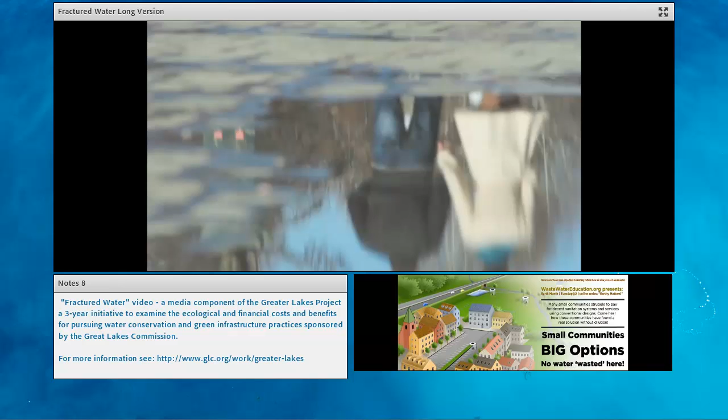One of the challenges we have in water management is the disconnect between what the general public perceive and what reality is. The way we have built infrastructure in our urban areas has disrupted the natural flow of water, which has created flood issues, loss of water supply that we need, and massive erosion issues we've never really had to deal with. That is affecting not only nature, habitat, and wildlife, but also having very negative consequences for people living in municipalities.

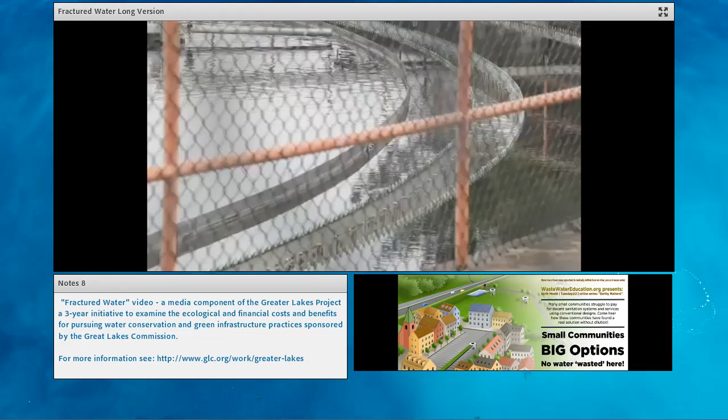With these extreme events, we're seeing basement floodings, we're seeing water treatment plants having to shut down because of algae growth. Those are all things that we're starting to realize the way we're doing things today is not working. A lot of that old infrastructure is now starting to leak, starting to break down, and therefore we are in danger of huge financial issues.

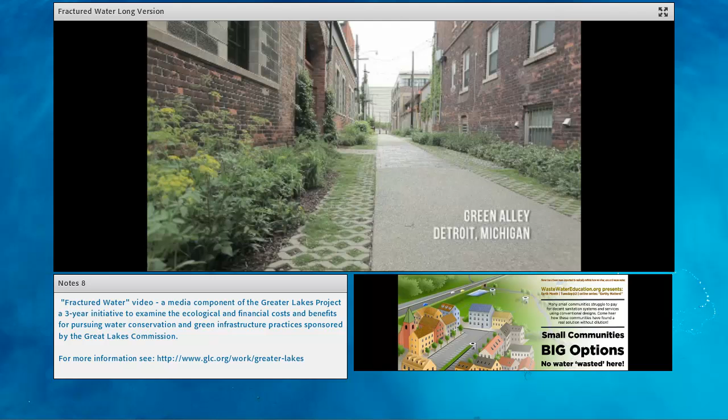Permeable driveways — that's interlocking bricks that allow water to go into the ground — rain gardens to reduce water consumption, but also to treat rainwater before it goes into the ground.

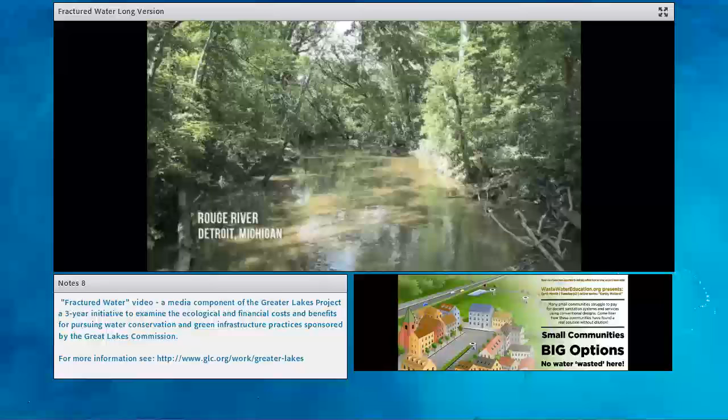We're in the Eliza Howell Park in the Brightmoor neighborhood of Detroit, along the Rouge River Basin. If we can incorporate more natural systems — and much of this is being contemplated and implemented right now through the Detroit Water and Sewerage Department in this area — we can actually be better stewards of this river and the Great Lakes overall.

Incorporation of green infrastructure systems, both large and small, they're not inconsistent with a very focused urban agenda. In fact, they're quite complementary. But we also need to be thinking much more creatively and innovatively about how we adapt new, different systems that actually leverage the existing assets we have on the ground, the topography that we have, the hydrology that's present. These are things we can do, and they can have a long-term, really powerful impact on overall cost and revenue balance, which helps everyone involved, but also it brings neighborhoods together and creates a much more healthful environment for people.

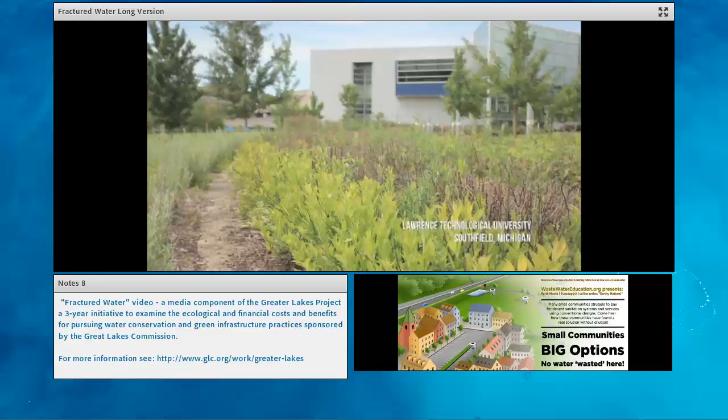We need to evolve just like other industries do in providing new products and evolving our science. Part of that means that we need to engage our community. We need to reconnect them with the water and with their environment. We need to show them how to recreate nature on their own properties and how business can do that economically and sustainably. But until we start seeing water conservation, water efficiency, and green infrastructure as core components of solving our

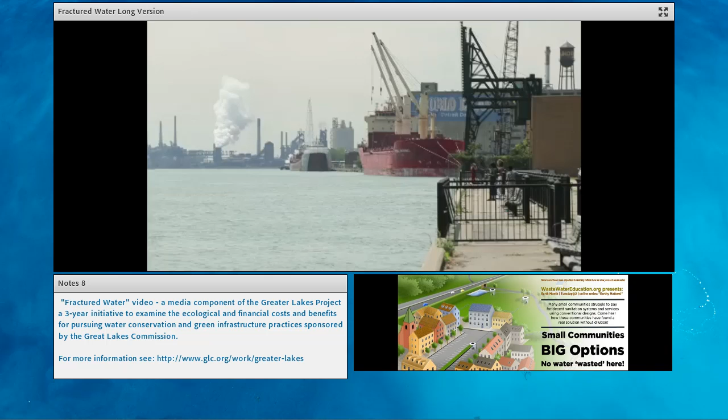water needs in municipalities, we won't make the big change that we need. And we've got to find a way to have a better coexistence with the Great Lakes. I think many folks are working to get there, both within the city of Detroit and across Michigan, and certainly within Ontario. But we do need to get there, and we need to get there fast to lay the groundwork for decades and decades of different types of investment over time. These things don't happen overnight. But our sense of urgency is really strong because we know we've got to set that new direction.

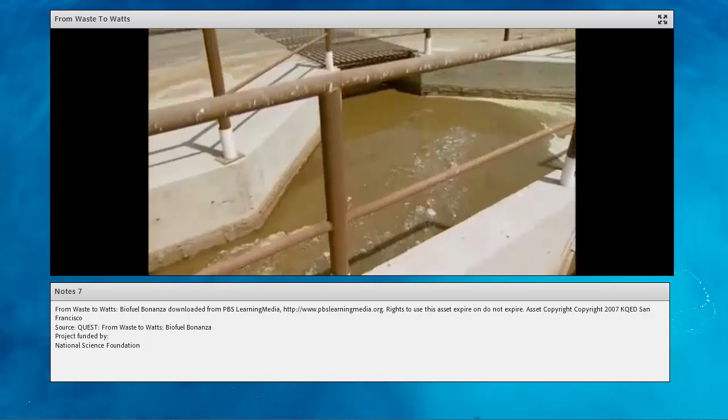Here at Joseph Gallo Farms, near Atwater in Merced County, General Manager Carl Morris shows me how to make power from poop. So this is the remnants of the cow poo. That's correct, in my hands. Yes, it's actually very nice and fluffy. The whole process starts when wastewater from the company's cheese plant is used to flush manure from cow stalls. Then solids are separated from liquids. Well, this is the separated manure solids from the separator here. It's actually a very high straw content. It's just what passed through and wasn't digested, and gets separated out.

The remaining manure water is pumped into a 7-acre covered lagoon, where natural bacteria from the cow's gut break it down in an oxygen-free, or anaerobic, environment. Well, here we are on our digester. We're actually walking on top of 45 million gallons of manure water. That is a new experience for me, I have to say. This is covered by... As bacteria consume organic material, a complex biochemical reaction occurs, and the carbon content of the waste is converted to methane. The dairy's equipment then traps the gas, cleans it, and burns it as fuel in 2 generators.

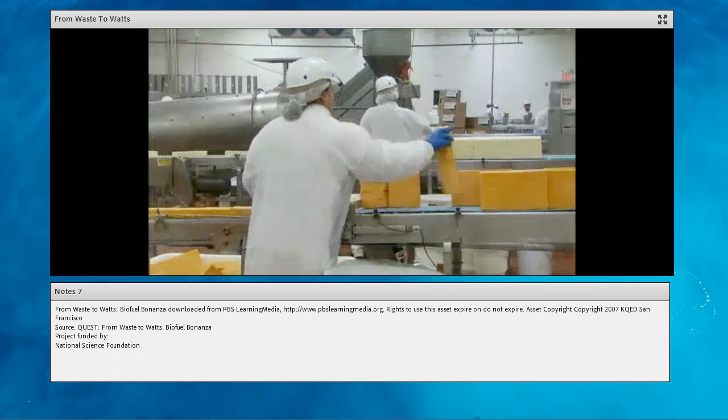The system provides as much as 80% of the electricity needed to run the company's cheese plant. And how many cows do you have here at Joseph Farms? Well, this dairy, our Cottonwood dairy that feeds this digester, is about 5,000 cows. We have a total of 16,000 cows on 5 dairies. And how much manure do they produce every day? A lot.

The average cow produces about 90 to 100 pounds of manure, so you do the math. Every single day? Yes. Does it go up and down then? Not that much, it's usually billowed up like this. If it goes up too much, there's emergency vents there.

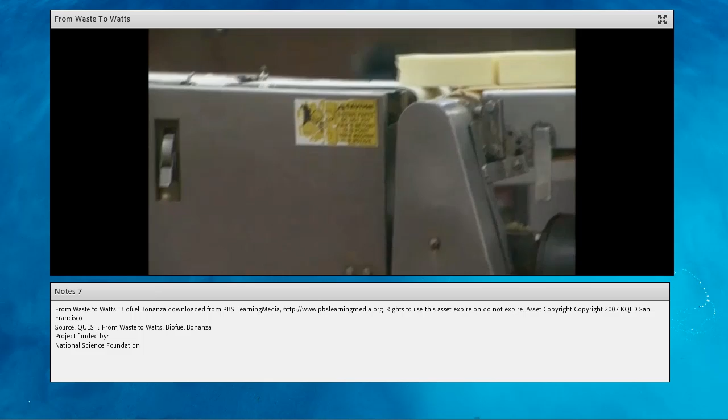All this gas adds up to impressive savings for Joseph Gallo Farms. They've knocked off $1,500 a day from their electricity costs and saved 300,000 gallons of propane per year. The system cost about $2 million, $600,000 of which was funded by a grant from the California Energy Commission.

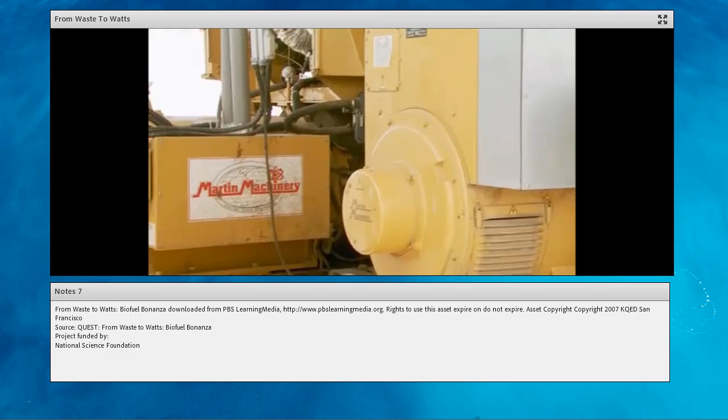Although the technology is promising, experts say it won't be widely installed at dairy farms until utilities like PG&E are required to buy back the electricity they generate.

If the methane from California's 1.7 million dairy cows was captured and converted to biogas, it could supply upwards of 120,000 homes with electricity. You know, when I see waste, I think of resource.

We don't make a connection between our food and the products we consume and the waste we generate. People know, they've heard got milk, but they don't think get manure. And that's something I want people to get, because that is really an important issue in terms of both environmental impact and potential environmental benefit.

Manure, while not quite as sexy as other green energies like solar and wind, has an added ecological advantage. Not only does the use of biogas offset the use of fossil fuels, it also greatly reduces the air and water pollution that would normally result from dairy operations.

Because we have a lot of cows in California, actually 1 out of every 5 gallons of milk produced in the United States comes from California, so there's a lot of cows producing waste. They have an impact when that waste hits the ground. And when it hits the ground, it does more than just stink.

It contributes significantly to global warming. Cattle waste is responsible for about 20% of all the methane emission in the U.S. Like carbon dioxide, methane is a greenhouse gas, but methane is 21 times more damaging than CO2.

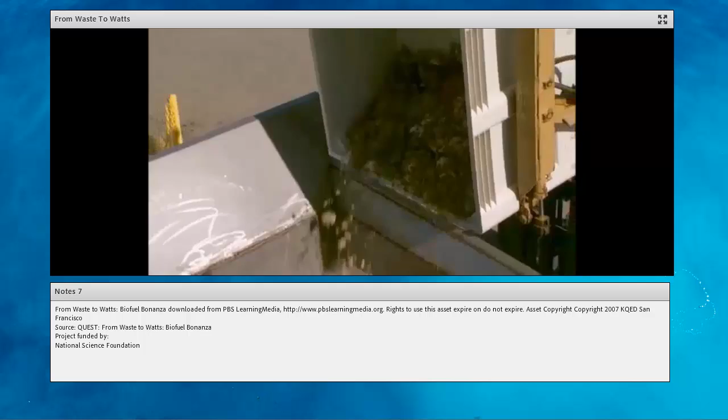Here's how it works. Food waste is collected from restaurants and institutions, like here at the UC Davis cafeteria. It's then trucked across campus to the digester, where it's loaded into the hopper. Conveyor belts pump the stinky sludge into tanks, where special microorganisms chow down.

As the microbes digest the waste, they produce gases like hydrogen and methane. Zhang's design, which was built by on-site power systems, captures and separates these gases, then turns them into several different kinds of fuel. We make a methane gas which we can use to run a generator and make electricity.

We can make compressed natural gas. We can make liquid natural gas. We've got hydrogen we can use for fuel cells. We can blend the hydrogen with either natural gas or diesel for a higher energy yielding fuel.

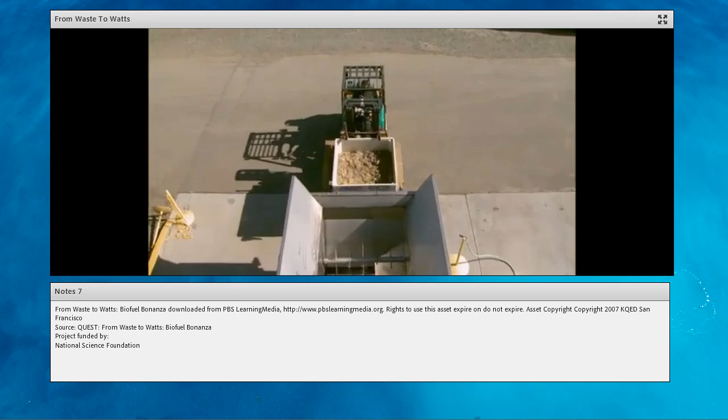Zhang's digester has the capacity to transform 8 tons of waste a day into enough electricity to power 80 California homes. It was designed as a proof of concept to demonstrate the commercial viability of this technology.

One of the big advantages of this one - there's a lot of digester technologies, but they're more centralized plants, you have to bring all the feedstock in. We're scalable. We can build it to fit the size of the customer's needs.

These are 10,000 gallon tanks. We're looking at some for the City of Industry that will be 250,000 gallon tanks. That allows us to go anywhere in the state and build it where the waste is, and that gives us an amazing advantage over the other technologies out there.

Wherever people eat, there's waste, lots of it. And NorCal Waste Systems in San Francisco is putting it to good use. For its composting operation in Vacaville, they collect 300 tons of food scraps every day from more than 2,200 restaurants in the Bay Area, including the 4-star Jardiniere in San Francisco.

Here we have our big green dumpster, so any of our renewable food scraps go into this dumpster here. And then we have our blue bins and our black bins, the black bins being actual garbage, and then the blue bins being recyclable glass and paper.

And since you started this program, about how much have you reduced your landfill waste? I think we've probably reduced the landfill waste to 8 to 10% of the garbage that we're generating now.

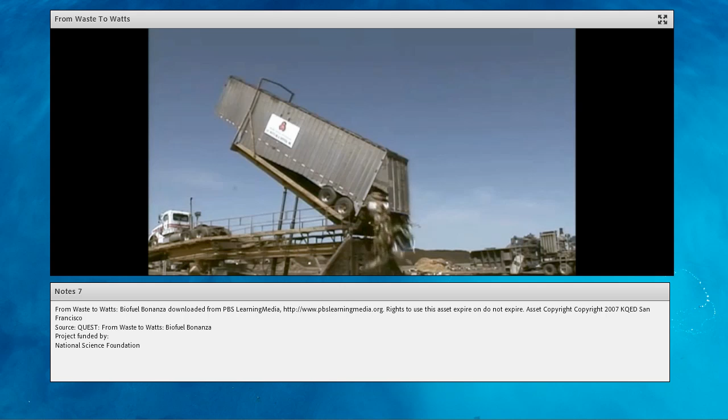So I hope that has whetted your appetite, so to speak, for what's coming up. If anything, that should have drawn your attention to a couple of things here.

First of all, the idea that backyard septics is not the only thing that we're talking about here. Easily a quarter to a third of the country relies upon individual treatment systems. And these are not just your grandpa's backyard septic system. These are large-scale, commercial-scale, on-site treatment systems.

That video we saw is 10 years old. And that may have been a proof of concept, but now there are digesters all across the country. There is a very large municipal digester plant, not, I would say, 60 miles from where I'm talking from.

And the idea that individual treatment for individual need is eminently financially scalable, and also makes really good sense if you are trying to preserve the character of your community, or you have a particular type of waste stream that you're dealing with, such as the winery, such as the cheese plant.

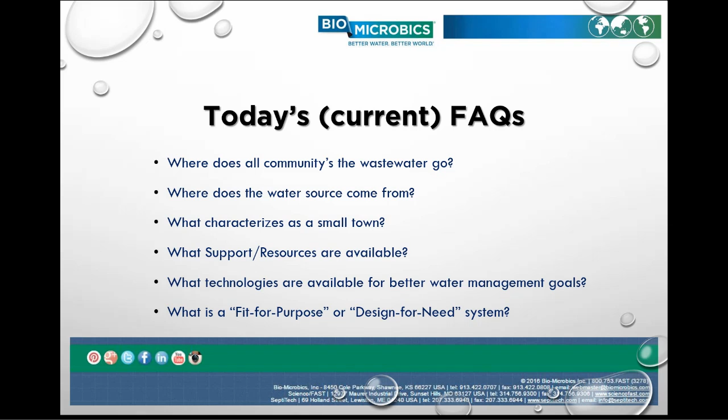Centralized sewering systems are made to be able to leak. I mean, it's just infrastructure with pipes going miles and miles away. The urban water systems leak the equivalent of 13 million Olympic-sized pools every year. This is a statistic that was shared on World Water Day this year, that the World Bank Group and the World Bank Water Group had tried to impart, showing why there's a growing concern for the way centralized sewering systems are not addressing the need.

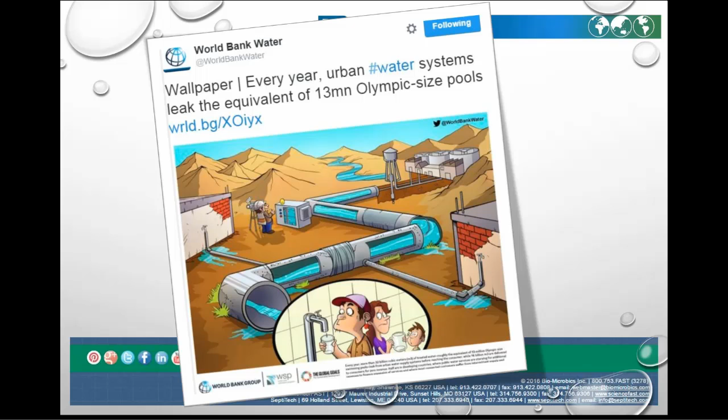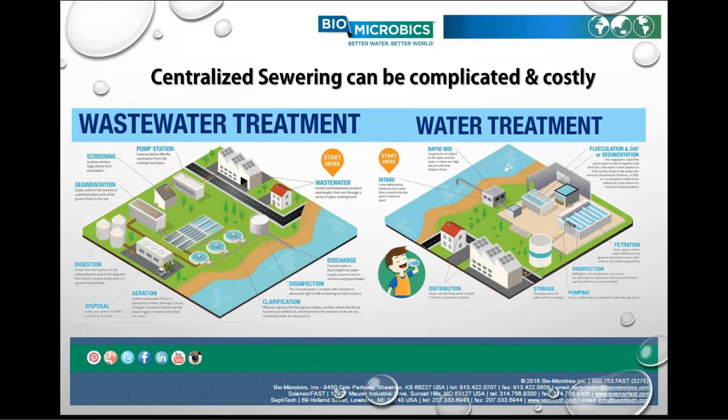But instead of water bills for decentralized technologies, you can actually treat and manage your own water on site versus having to pay and throw away that water that's been used.

So decentralized technologies take wastewater solids, just like the wastewater treatment plants. It takes the wastewater, separates it from organics and inorganics, also separates the material down to soluble, insoluble levels, and down to the degraded level to where it's treated water. So once you remove the waste, you're back to the original component of water and have it available for water reuse.

The driving force for water management systems, with these statistics, more than a quarter of the homes are currently on septic systems, whether it's advanced or just conventional. These systems are currently in operation and meet any number of regulatory requirements.

The projection is that 37% of new home constructions will be on on-site systems, and that could include gray water treatment systems and recycling, or other systems like irrigation or water reuse systems considered with new home construction nowadays. 10 to 20% of the older systems will need to be maintained or upgraded, that's something that is a yearly aspect of the type of systems we're talking about.

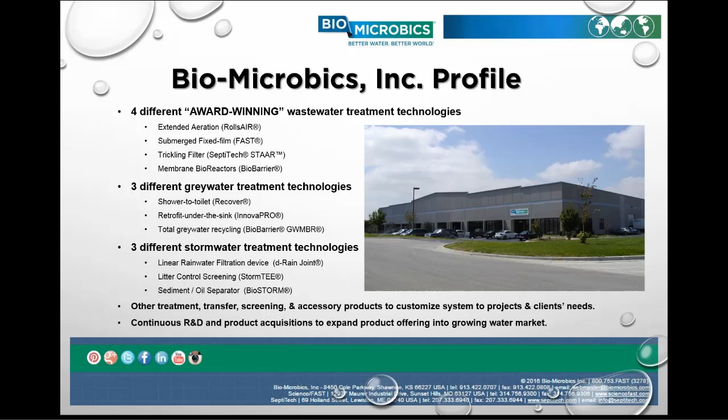So again, Bio-Microbics, we are the manufacturer of these treatment systems. Why Bio-Microbics? We have 4 different wastewater treatment technologies, whether it's extended aeration, submerged fixed film, trickling filter, or even membrane bioreactors. 3 different gray water treatment technologies, 3 different stormwater technologies, all housed under one roof. So if it deals with water, we pretty much have a system that's designed to treat that. And other treatment and transfer systems that enhance a particular treatment system to meet the goals of the project. So we do all of that.

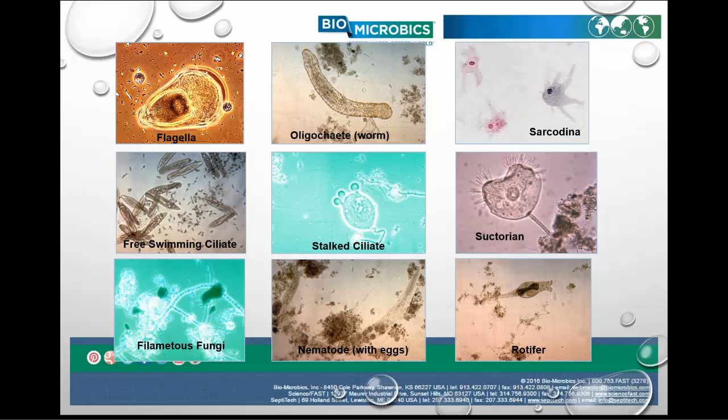So on on-site treatment systems, there's different levels of treatment, whether it's primary, which is just a screening device or something that removes the biological oxygen demand, or the BOD, and the total suspended solids to that level. We have a higher degree of treatment with advanced wastewater treatment systems. That's secondary, and that's what we call 30-30, BOD and TSS. And then the tertiary treatment level is even more of a treatment, higher water quality, and we call that 10-10 with BOD and TSS.

Again, this is to separate out all the solids to organic, inorganic, and each of the different levels addresses those needs, from the first screening from primary, and we do that with effluent screening devices, grease traps to trap most of the fats, oils, grease, and large inorganics, and be able to break down the larger organic solids. But it doesn't eliminate nutrients or oxygen depletion problems. This is more of your conventional septic system, only goes this far with its treatment level.

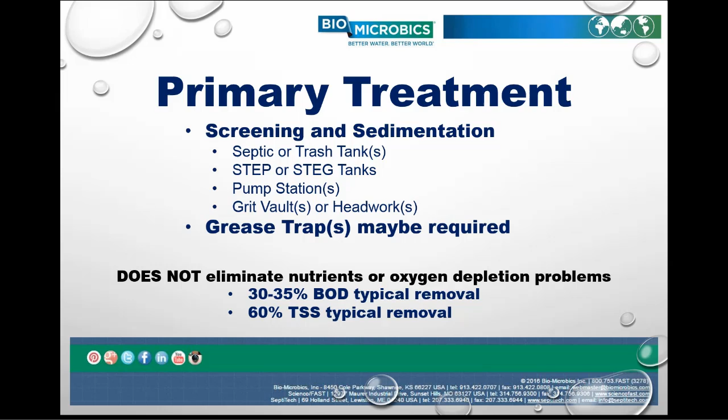For our treatment systems, we focus on secondary treatment. We introduce aeration treatment into the process, so again those aerobic bacteria can prey upon the lesser bacteria of the anaerobic type. The submerged fixed film activated sludge treatment is one type of technology. The STAAR trickling filters, the extended aeration is another type of technology, membrane bioreactors - all of these four are developed as secondary treatment options.

You can add in clarifiers, but really the advanced treatment systems do it all in one tank. That's not necessary unless it's required under certain regulatory requirements, engineering requirements, or additional removal of biological nutrients. The tertiary treatment, like with our membrane bioreactor, is a high nutrient removal, high effluent quality, and again this removes 99.9% of the contaminants out of the wastewater.

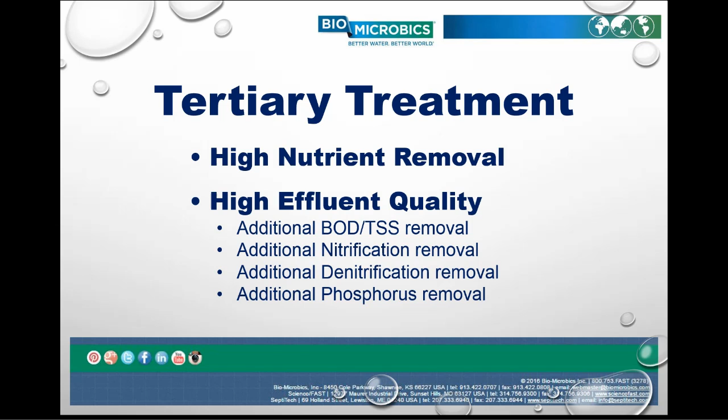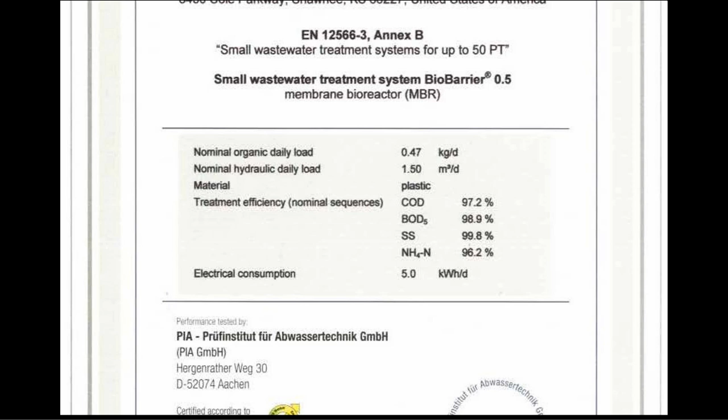Third-party testing shows these treatment systems do remove 97 to 99.8% of contaminants, and that's what you want in a tertiary treatment system, especially for water reuse. If you need direct discharge or direct use back into the house, you'd want to see these types of numbers.

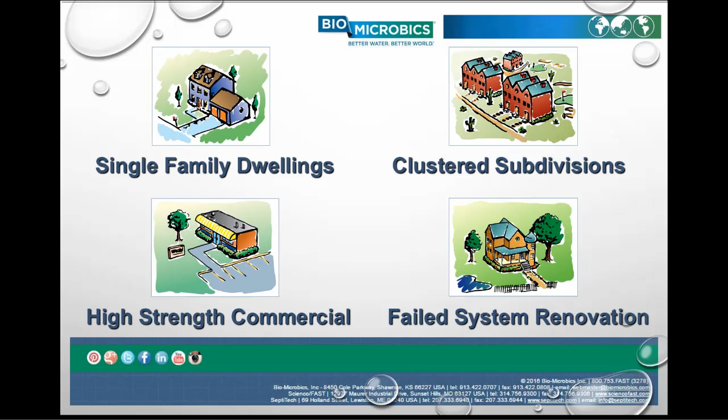Where are they used? Anywhere that people live - single-family homes, subdivisions, commercial properties like restaurants or business parks, and even renovating old systems into advanced treatment systems. We focus on all of that. High-strength waste usually comes from restaurants with a high amount of organics - unused food portions going down the drain, fats, oils, and grease. All of that makes the wastewater considered high-strength waste.

Recently, as we've put more gray water treatment systems on a property, it also reduces water consumption, but not the waste. So that wastewater is also considered high-strength, which is kind of a new concept for gray water treatment systems going into an on-site treatment system - the on-site system needs to take that into account.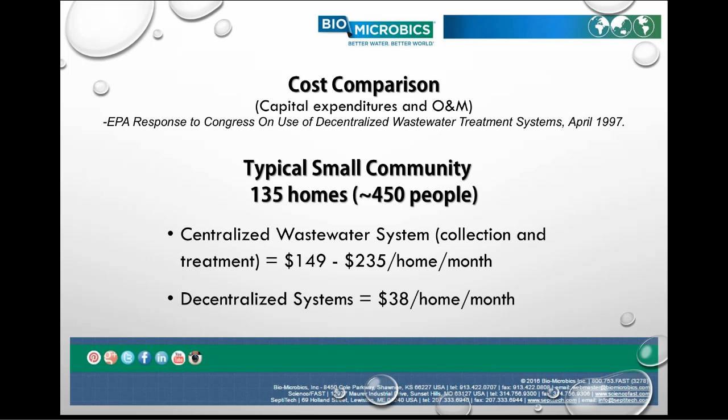The cost comparison from a centralized sewering plant to provide the same treatment versus a smaller decentralized system - it's well within reach for smaller communities that don't have the income level that other urban, larger cities would have. So it does make economical sense for the small community.

As we move forward to be able to daisy chain homes onto one system, there are different schematics or versatility to combine as many inhabitants' individual homes as needed to provide one treatment system. So they scale up easier than a centralized sewering system scales down.

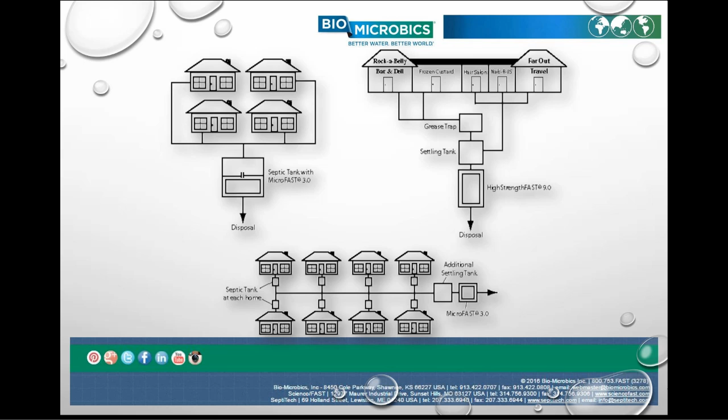When we talk about the large scale models, MyFast is a treatment system that goes from 10,000 gallons a day to more than 160,000 plus gallons a day, and we even have it up to 3.7 million gallon day flows.

This is a submerged fixed film treatment process, and what we mean by submerged fixed film is that our media remains underwater, and then we have an airlift that provides aeration throughout, and it naturally sloughs off any of the old growth to allow for new growth of the bacteria, and they adhere themselves onto the blue media.

Scaling up is easier for these types of treatment systems, and you can go from one person to 5,000 for a community.

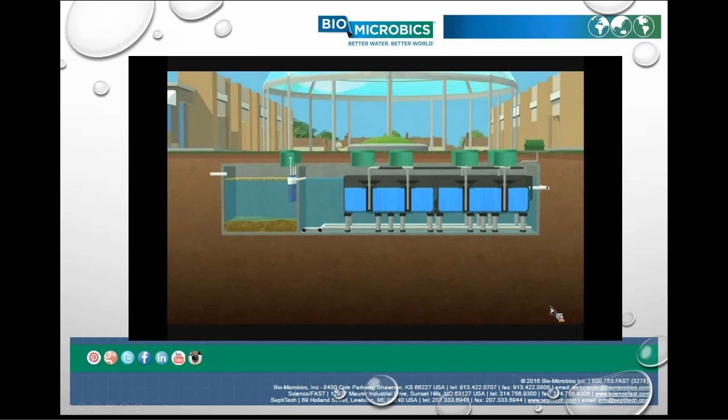How does it work? This is a concept that we have for a mall to treat all of the wastewater coming from the toilets.

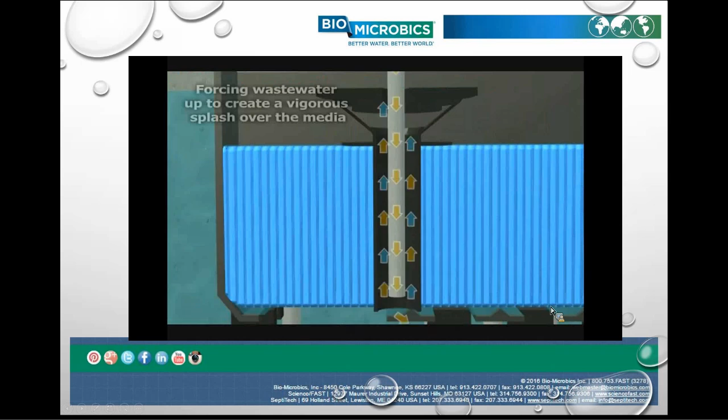The blower, above ground, is the only moving part to the system. It provides oxygen into the tank and provides the action of splash over the media to keep it oxygenated and aerated, and the bacteria will then form and grow on the media itself, consuming all of the organic material, bacteria and viruses. Those are the good guys right there.

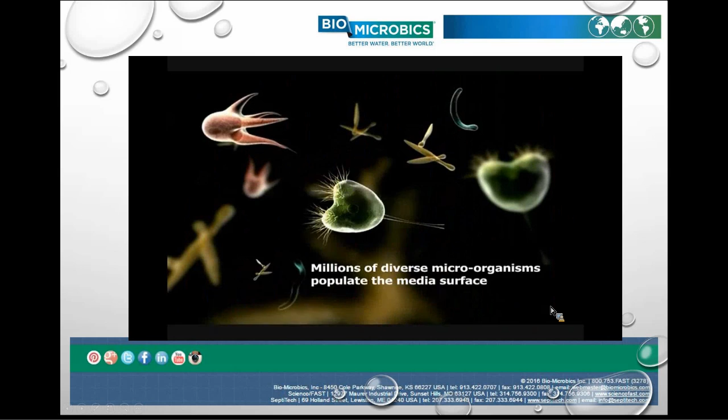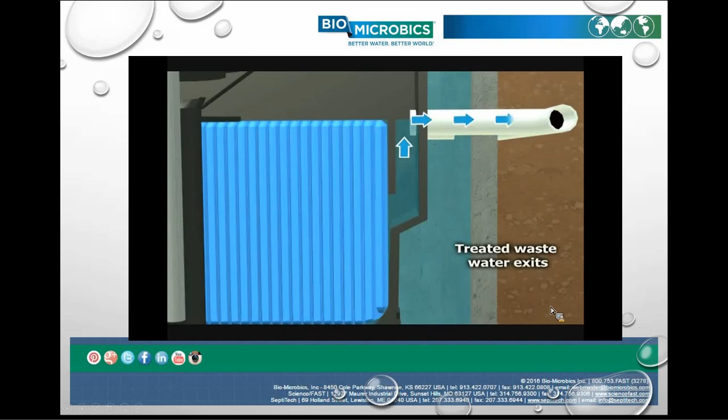That shows the natural sloughing off of the growth so new growth can then happen. There's only one way out of the system, and that's through the outlet, and 95% of all the contaminants and pollutants are removed, allowing you to do more with that water for either direct discharge, water reuse, or any other type of water dispersal system.

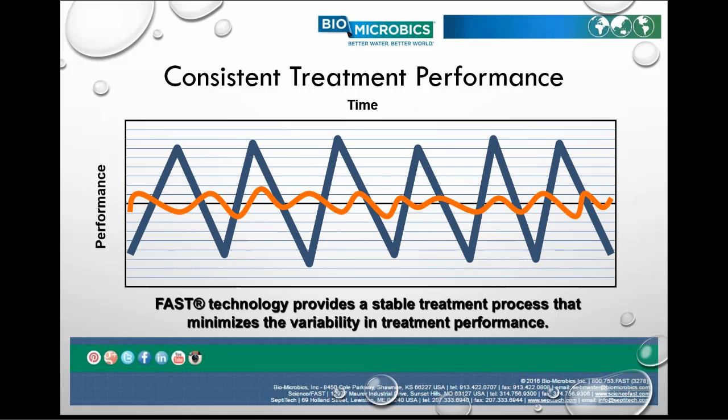The MyFast, just like all of our FAST products, whether it's a RetroFAST or the MyFast, shows consistent treatment performance. So while others go up and down from surges, our FAST system is more of a consistent, stable treatment process, and you have less of the volatile up and down data that you would get with other treatment technologies.

The RoolAIR is an extended aeration treatment system. It has the same flow rates as our MyFast system, but it uses just air into the treatment process. It's designed to be the simplest to install, operate, and maintain of its type.

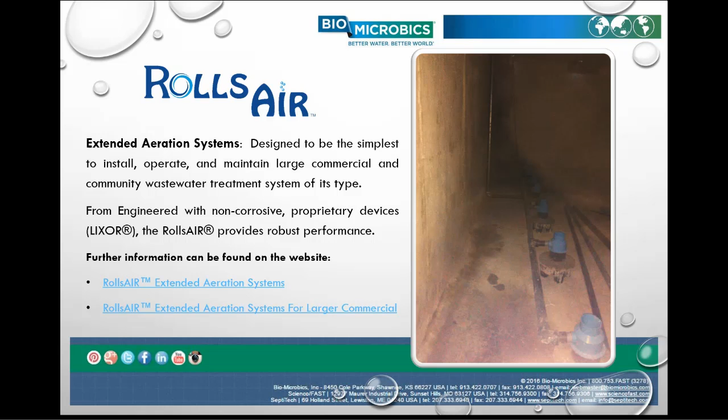It uses our LIXOR systems in a daisy chain to show this type of technology, and scaling up is not a problem for the RollsAIR system as well.

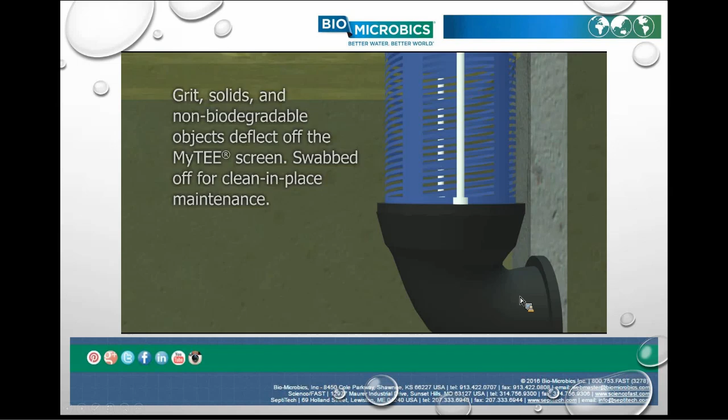We use a primary screening tank with our MyTEE, self-cleaning. Once it's installed, it stays installed in the tank and screens the wastewater into the treatment zone, bypassing a zone here to go into the larger tanks where all the LIXORs are installed and connected to the above ground blower, which is the only moving part to the system.

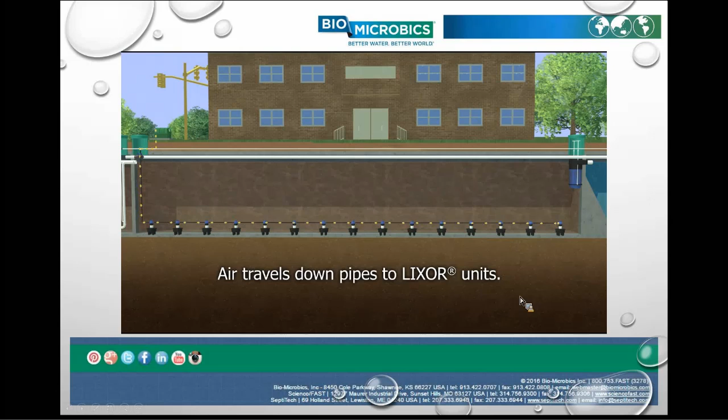This has a lot of versatility and configurations, so it's designed fit for the purpose, showing all the LIXORs working, and that's why it's the RollsAIR. The air rolls down the treatment tank.

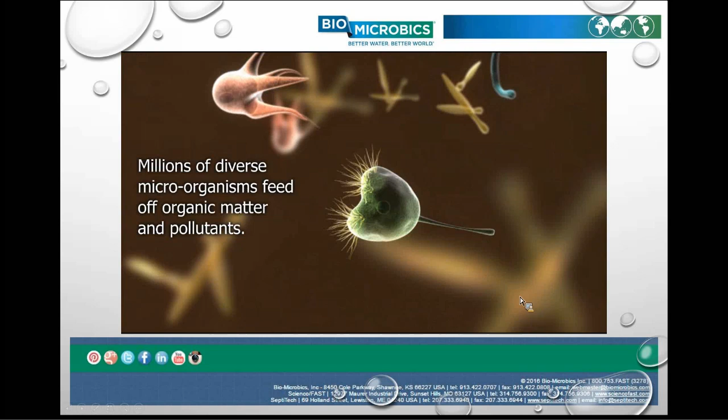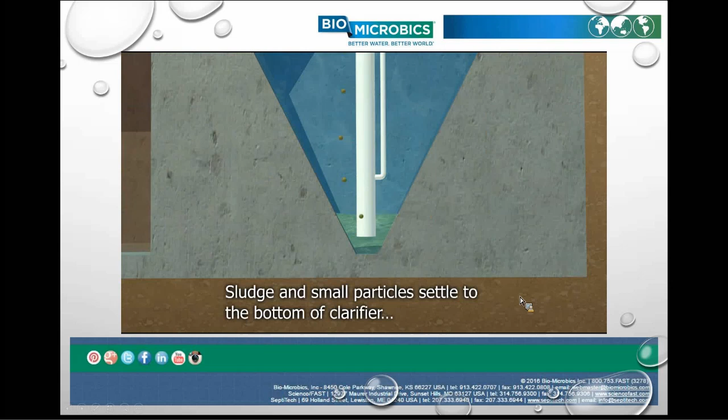It has two hopper clarifiers at the end, so as the bacteria consume all the organic material, they then go through the second screening process and can be clarified, and any sludge buildup at the bottom will go back into the treatment tank or into the sludge zone. It has its own built-in biosolids management system that keeps the health of the bacteria in the treatment tank alive and going.

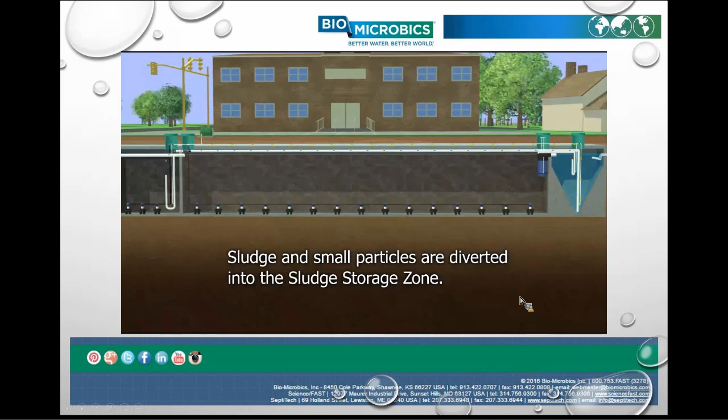There is a valve that switches it, so it can either go to the treatment tank, or it jumps over here to the biosolids management zone, so that you can store the biosludge here and pump this tank out periodically as it gets full.

So that's really the concept of our RollsAIR extended aeration treatment plant.

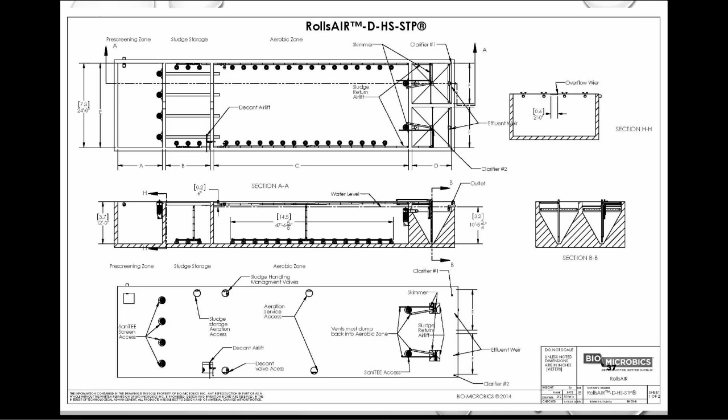This shows the engineered drawing for the RollsAIR. It's designed for the flow needed, and it can expand out as far as needed. Simple, low cost, robust.

The BioBarrier MBR system is a technology that's getting a lot of notoriety. Last year in 2016, we were part of the WRF's Passport to Innovation program that they presented at WEFTEC.

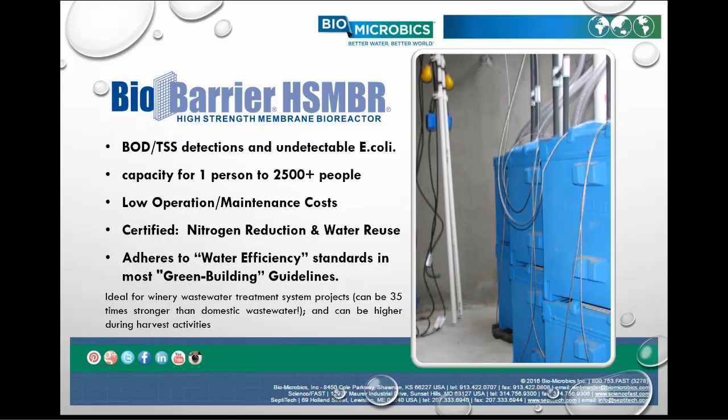This treatment process uses flat sheet membranes to physically separate the pollutants out of wastewater, and it has an aeration grid to provide aeration in the system and keep the membranes clean of clogs, providing treatment for anywhere from one person to 2,500 people in a community for their wastewater treatment needs.

They're also ideal for winery wastewater treatment that has a high chemical oxygen demand for the treatment of sugars from winery waste activities. So a lot of wineries are looking to install BioBarrier systems instead of just conventional methods or other treatment technologies.

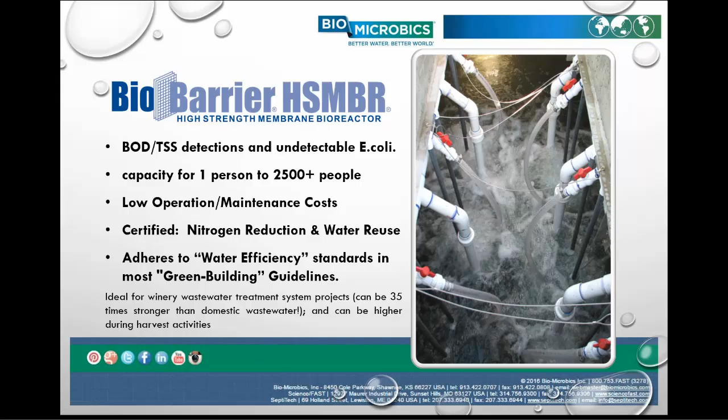It's installed inside the tank, has the primary zone for screening of the solids and the inorganics through the SaniTEE system. Once it's installed, it stays installed. We have a clean-in-place system, just like the MBR has.

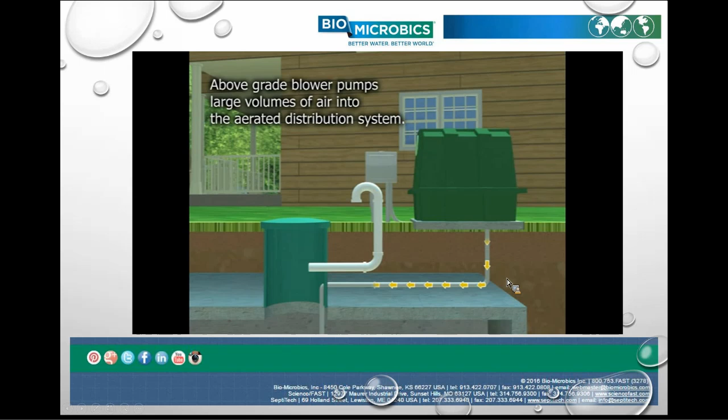The above-ground blower is the only moving part, providing oxygen into the tank, directed toward the air grid underneath the membranes to keep them clean. It produces a robust action of aerated wastewater, the mixed liquor, outside of the treatment module, again promoting the aerobic bacteria in wastewater.

The flat sheet membrane goes down to 0.03 micron, so that the only thing that exits the system is just water.

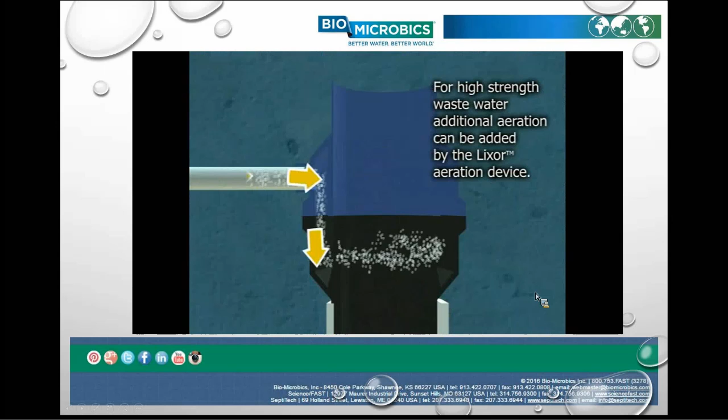You can add additional aeration treatment systems with the Lixor system. That's an option for any type of project or requirement. Usually with high strength waste, it would require that, giving more opportunity for what to do with that water after the treatment process.

And for higher flow perc rates, it still does a tremendous job getting the wastewater as clean as down to water levels.

The soil permeability rate is 0 to 480 minutes per inch range, because the filtrate is just water and contains none of the organic compounds or pollutants that soil-based systems would still have present for the soil to treat. So BioBarrier has a better opportunity for water reuse than soil-based systems.

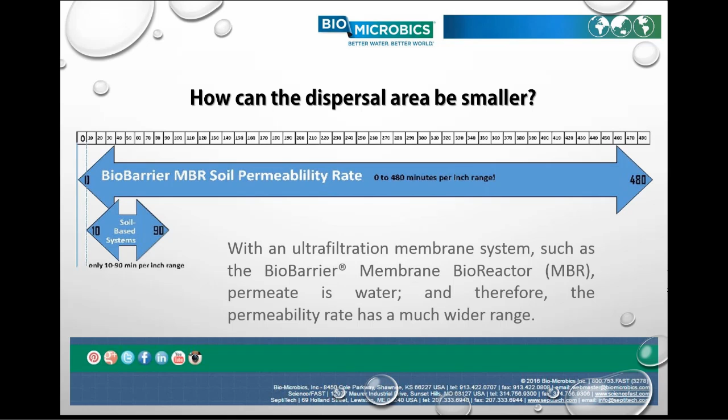And the term is ultrafiltration because we're talking about wastewater.

Since the permeate out of the system has that high degree of permeability, the drain field doesn't have to be so large, at a fraction of the size of a traditional drain field. This reduces cost all around because you don't have to set aside land for that large of a drain field. For small lots or lakefront properties, this is the ideal treatment system.

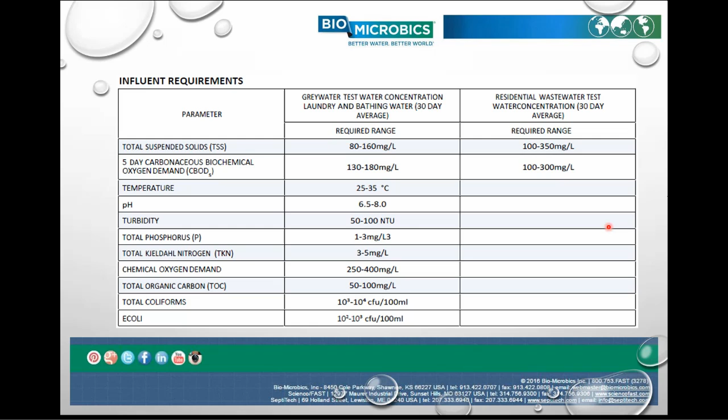This shows tables of influent parameters compared with the NSF 350 influent parameters and the type of required range that NSF 350 must meet, whether it's gray water or the wastewater concentration.

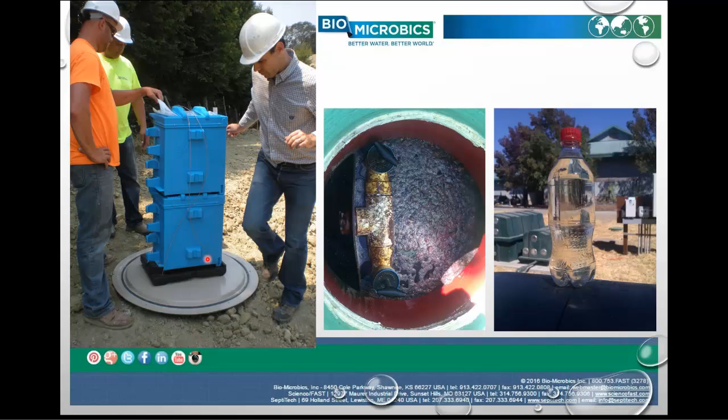This shows a double stack, so when you stack two modules together, that becomes 1,000 gallons a day, and that's how we size exponentially, getting into the high strength membrane bioreactors for sizing. It's an easy way to size the system designed for the flow needed.

This shows a primary settling tank with two of our SaniTEE units. They're versatile, so if you need one effluent screening device or more, we have 4-inch, 8-inch, and 16-inch for primary screening at different slot levels, whether for 8-inch or 3/8-inch flows, or even stormwater flows. And that shows the effluent that comes out of a BioBarrier system.

All the water being consumed in this dorm is treated and recycled back on its own closed loop system, showing that these technologies are available and that they do meet the health and public health standards necessary for water reuse.

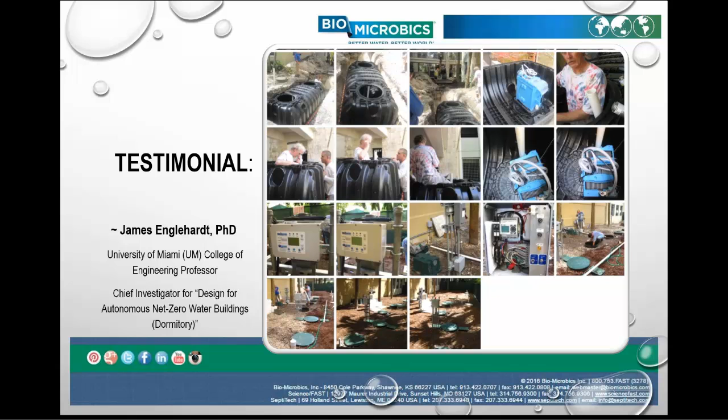And this is the testimonial that the chief investigator for this project had for his findings, and really was astounded at the quality level that this little blue box provided them for this to meet the goals of this project.

With on-site soil-based systems, no matter how complex or well-managed, they are temporary. The loading rates for soil-based systems are sized to accommodate clogging by organics, but it usually happens sooner rather than later, just because people don't know enough about their septic system and still put fats, oils, and grease down the drain. Soluble organics and clogging happens with either not knowing what to do with their septic system, or not maintaining it, or just sheer age alone.

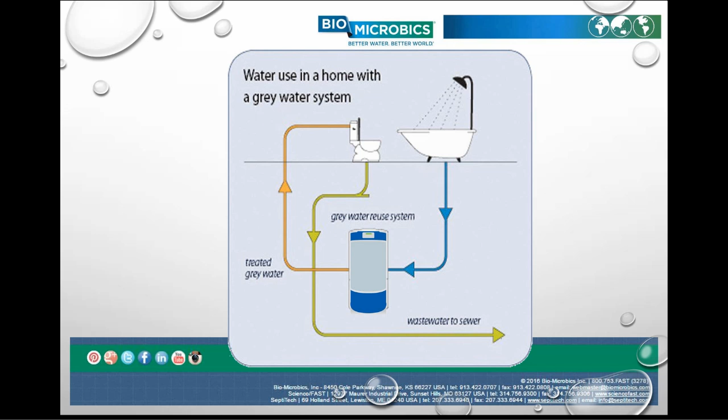So moving on with gray water opportunities, we do that too with 3 different technologies we have available. We have our recover system, and that shows a water conservation of about 30% reduction when you can combine your shower water and your toilets to save that water usage inside the home.

The system also auto-detects toilet leakage, which is another problem with larger systems, since the only way to currently detect a toilet leaking is when you get your water bill. So it's nice to know on the front end if this panel shows that there's a constant water feed happening in your toilet, then you can address it before it becomes a financial surprise later.

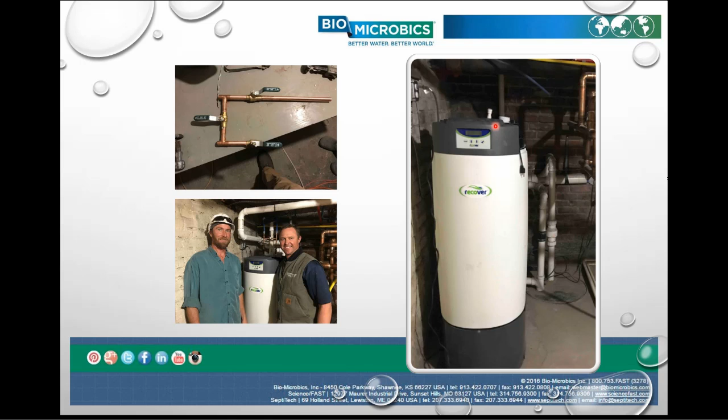How it works: it takes the shower water as it's being used, fills up the tank, and it gets screened by the 100 micron screen that's in there. It gets chlorinated with a chlorine tablet, and every time that you flush the toilet, it has the treated gray water available for the next flush. So every time you shower, it will fill up, and a 10-minute shower can actually flush your toilet 20 times.

And people aren't aware that they use that much water a day just with cleaning process and toilet flushing. Again, this is 30% of your water consumption happening right in front of your screen right now.

Again, the leak detection: there's calculations that you can use to detect how much your toilets leak, but on the screen of a recover system, it will let you know how much water is being used, and if it does detect toilet leakage, it alerts you right away, so you don't end up having to calculate out the numbers yourself.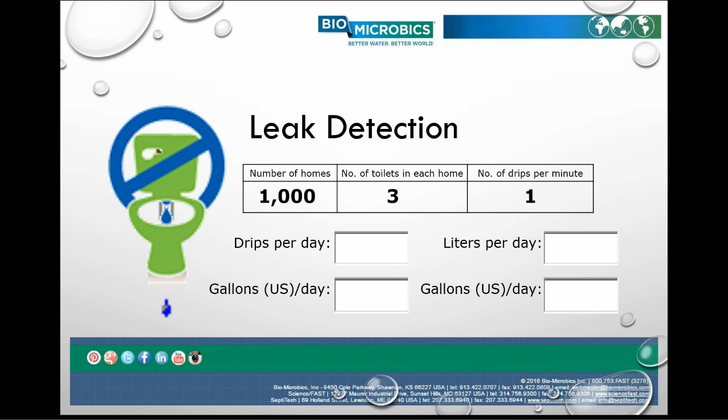Stormwater treatment is becoming a hot button topic. Currently there are so few regulations when it comes to best management practices for stormwater treatment that what we've introduced is the BioStorm system, which has the same concept as wastewater treatment: primary screening, and then a treatment module to do more of the finer treatment afterwards.

This is a great way to remove the 3 common pollutants out of stormwater runoff flows in the urban core by capturing trash and debris into the primary screening zone, and then removing sediment and hydrocarbons with the treatment module. So it's a 2-stage treatment system.

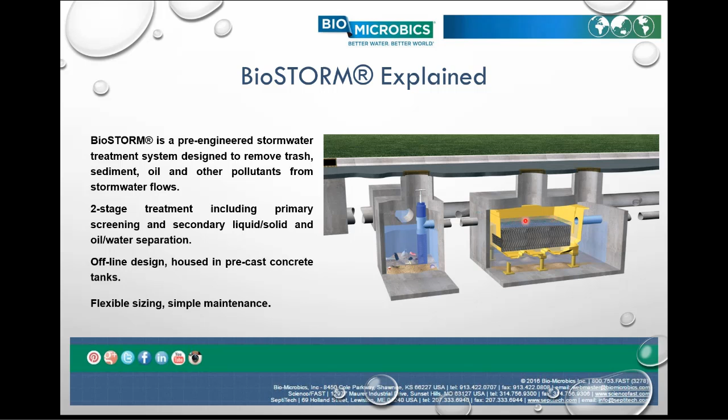This allows both treatment components to be used separately in different applications or together. So if you have 5 satellite locations where water flows off from the street, it captures all the trash into the first zone, into 5 individual litter control primary screenings, and then those 5 can be hooked up to 1 treatment zone. So again, this shows the versatility of the setup and concept for stormwater treatment.

And this treatment zone is a labyrinth using the media inside there, so the sediment settles to the bottom, hydrocarbons coalesce to the top, and there's only one way out of the system, going through this labyrinth of plastic media and out to the outlet T, either direct discharge or to a local reservoir.

If you're wanting to provide the water for a retention pond, because you've removed sediment and hydrocarbons, you can discharge that runoff water since it's been treated prior, and it doesn't promote the retention pond aging that non-treatment of stormwater tends to cause.

Easy maintenance: all areas are open to observation ports, so you can remove any accumulated litter, accumulated sediment, and accumulated hydrocarbons on a periodic basis, whether it's annually or every 5 years.

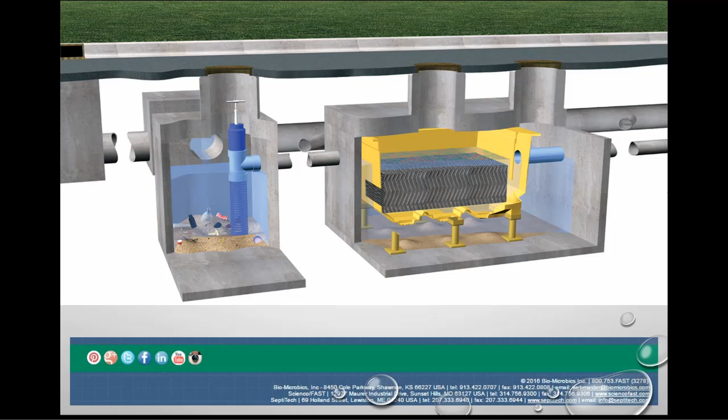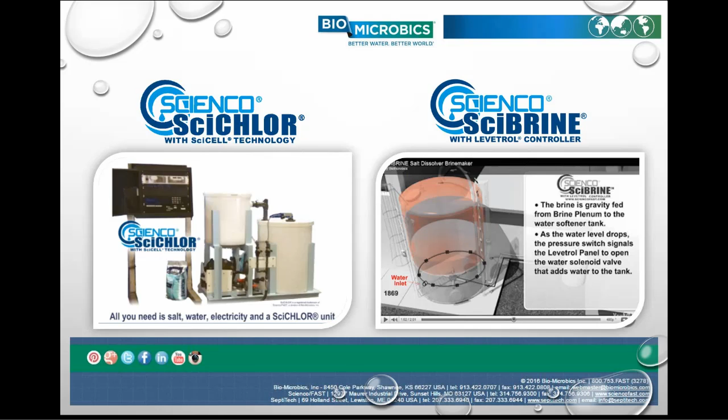Another aspect of Bio-Microbics that people aren't aware of is that we do have water treatment systems through our Scienco brand, located at our St. Louis location. They manufacture on-site sodium hypochlorite generators and on-site brine makers.

With the sodium hypochlorite generator, it takes brine water, salt water and electricity, and makes as much chlorine as needed for water treatment processes, or as shown in the dairy cows video prior to this, it can be used on animal husbandry farms to keep the animals disinfected and disease-free, providing large amounts of chlorine or sodium hypochlorite for the health of dairy cows.

Everything that touches a dairy cow has to be disinfected. So a dairy farm goes through an enormous amount of disinfectant solution, and it makes sense for them to have their own sodium hypochlorite generator rather than storing copious amounts of liquid chlorine, or worse, storing gas chlorine, which is highly explosive.

So this is a great alternative for them to provide that for their property.

SciBRINE has a lot of interesting applications to provide bulk salt dissolving solution for ion exchange, textiles, industrial applications, anything needing large amounts of brine. They'll need to store tons of salt, and might as well store the salt in a brine maker and produce the brine on site.

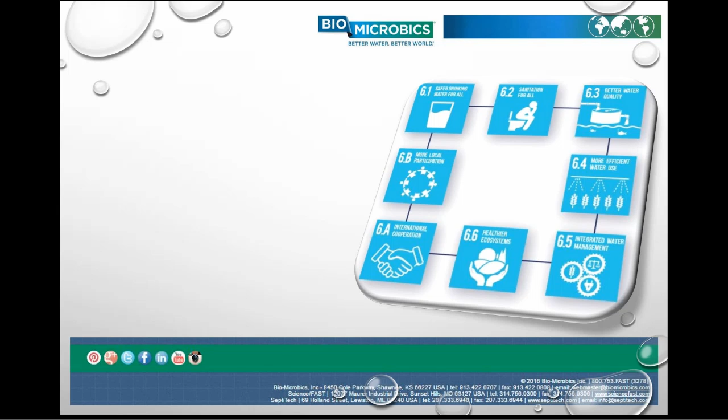A pre-treatment program, corrosion control, fats, oils, and grease program, and stormwater management should all be considered when a small municipality is designing their treatment system, to make sure they're identifying all of the streams of wastewater that could potentially enter the system and be able to treat that water to the standards for the goals of the community.

And that's it. That's small community. You have many options.

New knowledge about soil has led to success with septic systems. The idea is that the soil contains numerous bacteria, and that the bacteria then aid in purifying the liquid as it passes by. With the air found in loose soil to breathe, and with the food in the wastewater to eat, the organisms multiply and go to work.

The water clears in as little as 2 feet of good soil. But good soil is not found everywhere. Only about one third of the United States has soil suitable for conventional systems.

However, there are methods that make up for site limitations. An artificial drain field or mound can be built, augmenting thin soils. Or the biological action of soil can be put in a box of sand or other media. These media filters are then used to pre-treat the wastewater before it is dispersed to the drain field.

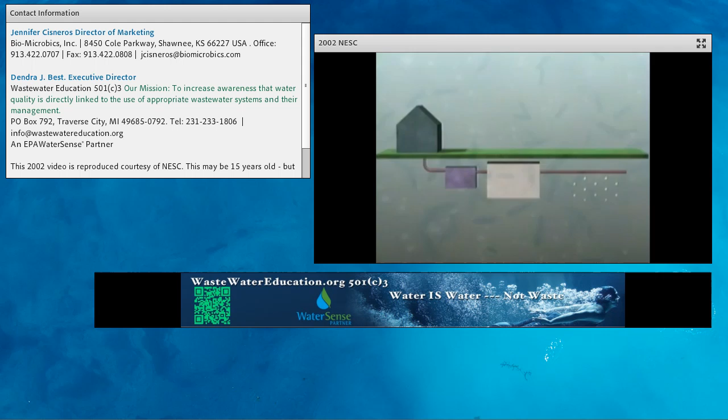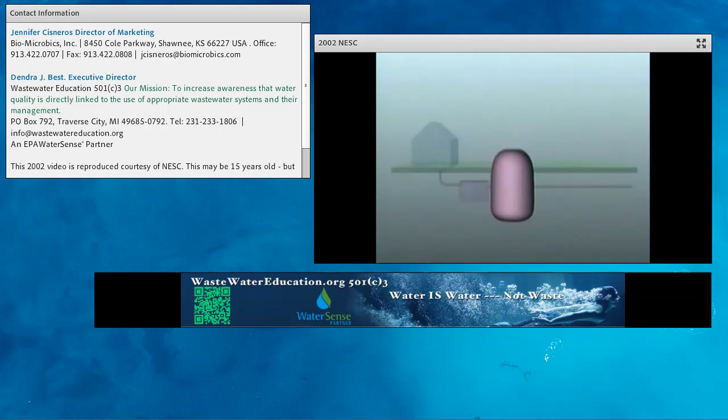Another method of pre-treatment is to blow air directly into a wastewater container where suspended organisms are present. The organisms breathe, eat, and multiply. When no more food is available, they die and settle, leaving clarified wastewater. These aerobic treatment units, or ATUs, pre-treat the wastewater before it is dispersed.

There are many variations in on-site system design, but all utilize the same natural biological processes. David Venhuizen, Texas designer and consultant, has been working with innovative on-site systems for many years.

The whole community doesn't have to be at one point or the other. It doesn't have to be all centralized or all on-site. It doesn't have to all be this level of cluster or that level of cluster. You can have different areas of the community managed in different ways. The idea is that the whole thing is one management system.

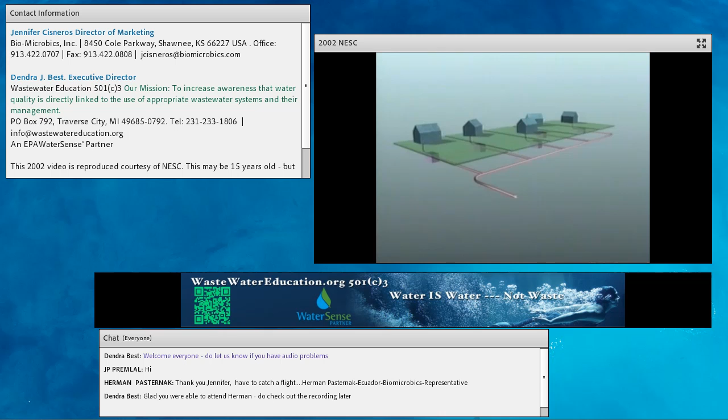If a good drain field cannot be found on everyone's lot, a cluster system may be a practical solution. Each house may have its own septic tank, but they are all connected to a single drain field. Cluster systems can be included with a variety of other on-site treatment methods within one effective community management system.

The California oceanfront settlement of Stinson Beach has operated a successful on-site management system for over 25 years. The 700 residences and businesses occupy very small lots served by on-site systems.

In the 1970s, many septic systems were failing. To avoid the high cost and the population increase that sewers and a central plant might bring, committed residents developed an on-site wastewater plan using innovative alternative systems managed by the Stinson Beach County Water District.

The engineering firm that I worked for before dealt with centralized systems. I thought at one time that was the only way to go, and I thought septic systems were basically an old method, until I came here at Stinson Beach. Looking at the way these systems operate and the monitoring system that we have here, I feel that the cost effectiveness of these systems more than outweighs the cost of a centralized system.

The conventional and advanced on-site systems here are continually monitored and maintained to assure protection of the sensitive environment. I think the management program here will work in just about every location. If it's done properly and it's managed properly, you should not have a problem. These systems could probably last 40 to 50 years without a problem.

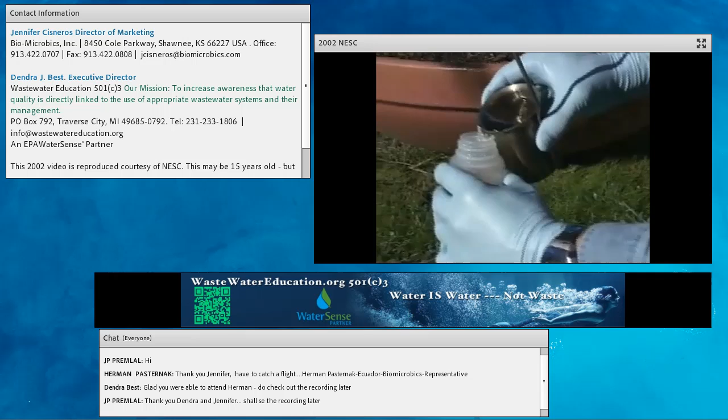We test the effluent straight out of the sand filters themselves, and our district engineer has been very impressed how clean the water is inside these sand filters before they get dosed to the leach lines. It's important that these sand filters do their job, otherwise it could send the effluent right down to our creeks and contaminate them. We've never had a positive sample in our streams.

When you have a problem with a septic tank, you have maybe a 250-gallon-a-day problem. When you have a problem with the sewer system, you've got 1 million gallons a day. For rural America, dealing with a 250-gallon-a-day problem makes a lot more sense than trying to deal with a million. I'm very glad I don't have to deal with 1 million gallons of untreated sewage when there's a problem.

In Edison, Washington, shellfish beds were being polluted by the local tidal slough, which contained effluent from failing septic systems and directly discharged waste. Doris Robbins and her neighbors were determined to find a solution that would not be too economically disruptive. We had to keep the expense down because this is a fairly low-income community with 4 generations of people living here. We wanted to keep them here.

To serve the 75 homes and businesses, community volunteers helped build a gravel filter. The local school district, also a major stakeholder, provided the high ground for the drain field and shares in the management of the system. We were able to cut the cost per site from $20,000 to $7,000, and for a certain income level, their costs were cut even further to $3,000. The first summer, people commented on how the slough didn't stink anymore.

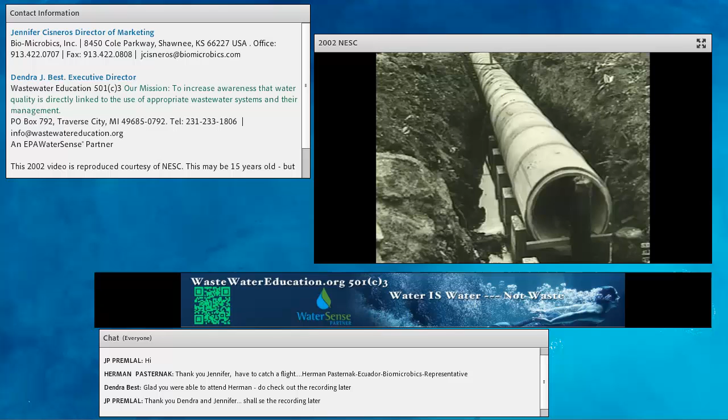Based on the Clean Water Act of 1972, everyone thought that we were going to have sewers. And so a mindset developed that septic tanks are only temporary, that we're going to have sewers. Well, now, today, we recognize clearly that we're not going to have sewers. But that mindset hasn't changed.

We've been doing work here at UC Davis on intermittent sand filters, textile filters, and the quality you get is superior to what you produce at a wastewater treatment plant. So, from a treatment standpoint, on-site systems don't have to take a back seat to more conventional facilities.

And because we can focus all of our attention on the treatment process, and we don't have to worry about the collection part of the process, it's really a much more cost-effective option than a central system, especially for suburban or rural areas.

Communities of people in rural areas really choose to live there, are proud of their community, and justifiably so, and want to take care of problems themselves. This is a very appropriate way for a community to have a high standard of living while protecting the environment, protecting public health, but still maintaining that rural character.

Most of our staff has realized that you can't economically sewer all rural areas. In the areas that need additional wastewater treatment, either for public health or water quality reasons, this could be a viable option with the management component, so that you achieve the desired treatment results and ensure the long-term viability of the systems.